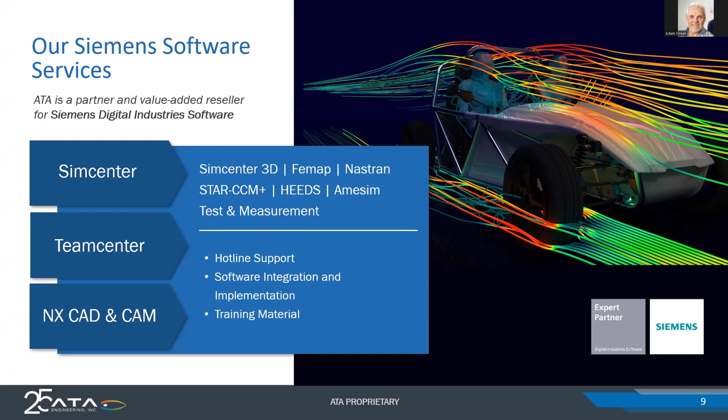So let's talk a little about our subject today. We're looking at STAR-CCM+ 2506, the new version. And Chris is going to talk about these new features, but really from a list of about 130, he's picked out the ones that we find of great interest to us, and he's going to talk about those in more detail. I won't read them out because you can read them too.

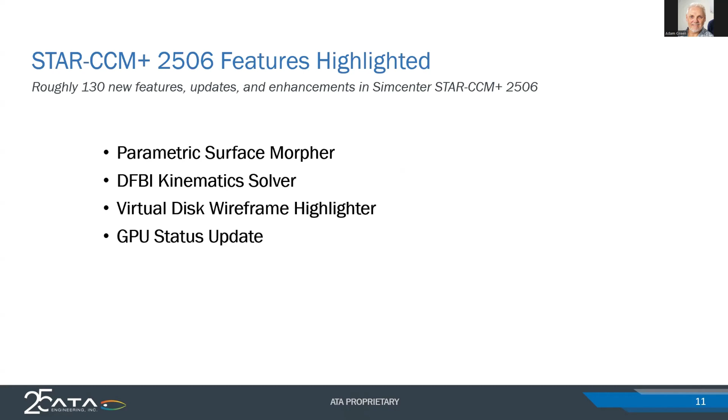But one of the things that is not on the list that Chris is going to do that is very exciting, another one of those 130 features there, is a new technology called ray tracing. STAR-CCM+ obviously deals with CAD data, deals with computer models of really almost anything, and often the results from a viewing point of view sometimes look as if they are CAD data.

They look as if they're a little sterile compared to Hollywood kind of thing. So ray tracing is not new, but it's new in STAR, and it lets you really deliver photorealistic images of CAD models and CFD results.

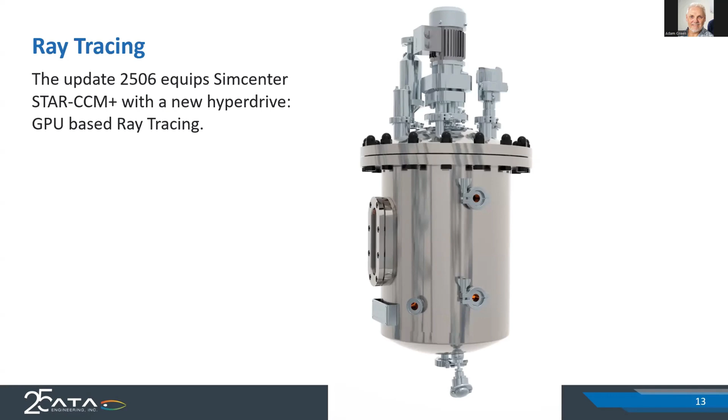So if you look at something like this tank, that shows up made of stainless steel. If you're looking at that as a CAD file, you might not see that. So this is actually a STAR model, fully ray traced, and looking very realistic. And with screenplay within STAR, you can also apply the ray tracing and the geometry selection to really create very photorealistic videos and still frames.

And so this is a little different to GPUs, which is something Chris is going to talk about in his presentation, where GPUs are used to accelerate the mathematics of solving. But in this case, this uses a specific part of the GPU, mostly desktop GPUs, for ray tracing with RT cores from NVIDIA, really developed for the gaming industry, but with a specific hardware algorithm on a chip to let you do ray tracing very quickly and at very low cost.

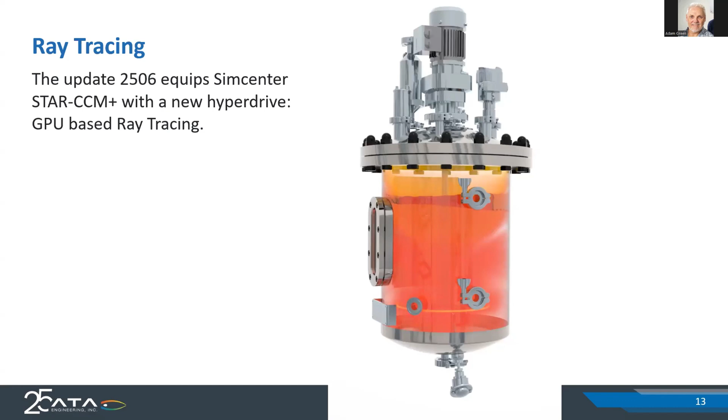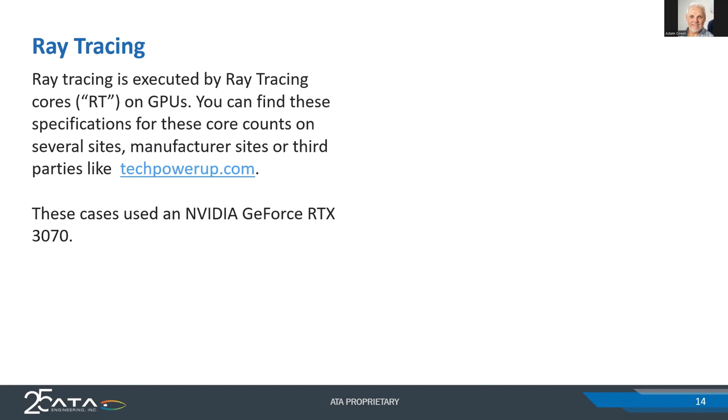If we look at some of these examples, basically it runs on the GPUs, but that last example was run on an NVIDIA GeForce RTX 3070, which is about a $200 desktop graphics card. They have ray tracing cores on board to be able to do this. So this could be done by everybody in our audience, and everybody who is using STAR could certainly add a decent graphics card and be able to do ray tracing on all of their models to add a level of photorealism.

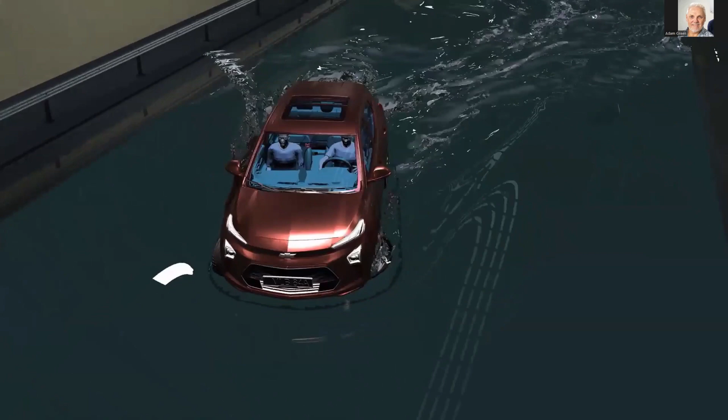And so when we look at this next video, I hope this gives everybody a feel for what can be done. Now, remember, this is a STAR model and the results from a STAR simulation. So it's a CFD model, but really every part of it looks very photorealistic. Now we can tell it's still a computer model. It's not that realistic, but it's still a lot better than we've seen previously.

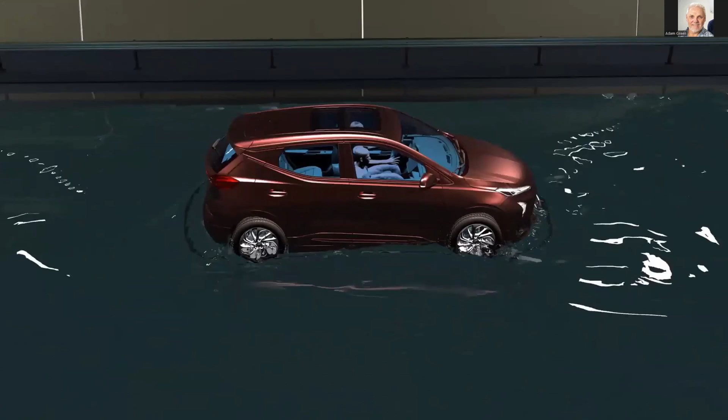Let me actually play that once more because I think it's interesting. Obviously the car's ray traced, but also the water that the car is passing through has reflections as well, and all of the pieces of the visuals are applied. So I think it's very exciting, and I hope that the members who are listening and people who are watching the recording of this will try that out.

So without further ado, over to you, Chris. Thanks a lot, Adam. Can you see my screen? Yes. Great. All right. Thank you so much.

Yeah, so as Adam mentioned, a lot of new features were introduced in STAR-CCM+ 2506, roughly 130 if I counted correctly. I don't have time to go through all of those, but I picked out 4 that I thought were worth mentioning. They may not be the 4 most impactful features to you, but I thought that they're interesting, worth pointing out, and in the case of the DFBI Kinematics Solver, kind of a fun example of what you can do.

So I'll start with the Parametric Surface Morpher, which I'll go into more detail about later, but it allows an analyst to parametrize geometry for which no CAD exists and the analyst only has access to a tessellated surface mesh. So this kind of opens up the pathway to doing design trades or even design space exploration.

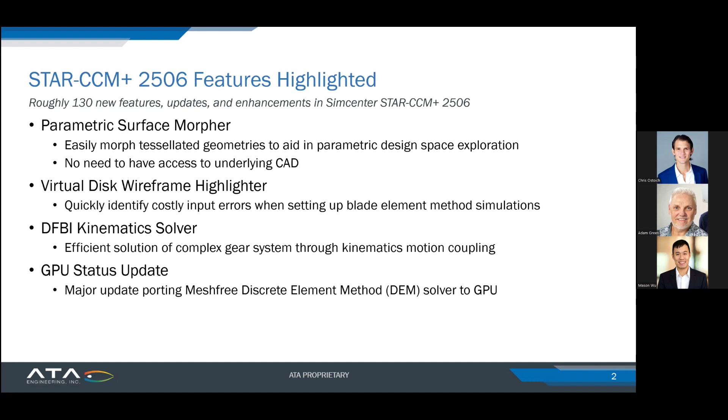Okay, so the Parametric Surface Morpher allows parametrization of tessellated geometry. To arrive at a good design oftentimes requires a back and forth iteration between CAD design and analysis. Ideally, an analyst performing the trade studies might have access to the CAD so that he can make changes to that geometry. Unfortunately, sometimes only tessellated geometries are available to analyze, and this can make design iteration on the geometry very difficult or even impossible.

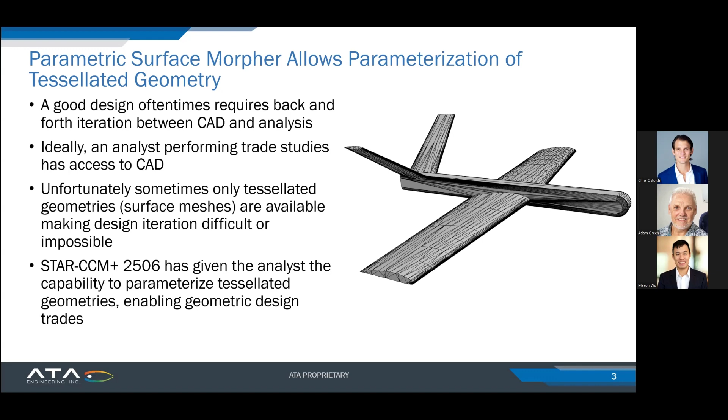Luckily, in STAR-CCM+ 2506, the analyst is given the capability to parametrize tessellated geometries, enabling them to make geometric design trades. So the example that I'm going to use here is this drone that I pulled off GrabCAD. And I'm going to use this parametric surface morpher to change the length of the wing of this tessellated drone geometry. So this is very easy to do.

I first just needed to identify the displaced part. So in this case, it's just the tip of the wing, and I'm gonna say this is the part or the surface that I'm going to displace. And then I identify the floating surfaces. Those are the surfaces that are attached to the displaced surface. So as I move that wingtip out, of course, the wing surfaces need to float along with that motion.

And then there are also the fixed surfaces. So you can specify these, but by default, STAR will just assume that anything that is not in the set of displaced surfaces or floating surfaces is a fixed surface. Then specify the translation vector and the coordinate system along which that translation occurs.

So the example that I'm using here again is this wing of this drone. And shown on the lower right, I've got my parameter, morph length, is what I call it. So at 0, we've got the wing with the original length, and then if I put it at 0.5 meters, then it extends the wing. And this drone has a wingspan of approximately 2 meters.

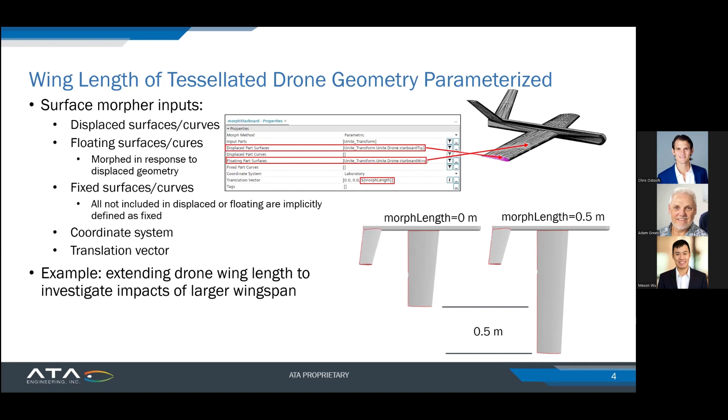So this enables me to make design trades, or I can plug it into STAR's design manager and do a full-on optimization. So in this case, I'm doing a multi-objective optimization. The results here are kind of trivial because I'm only varying this one parameter, but with this parametric surface morpher, I was able to take this tessellated geometry and really understand this design space and understand the trade-off of lift over drag versus wing moment.

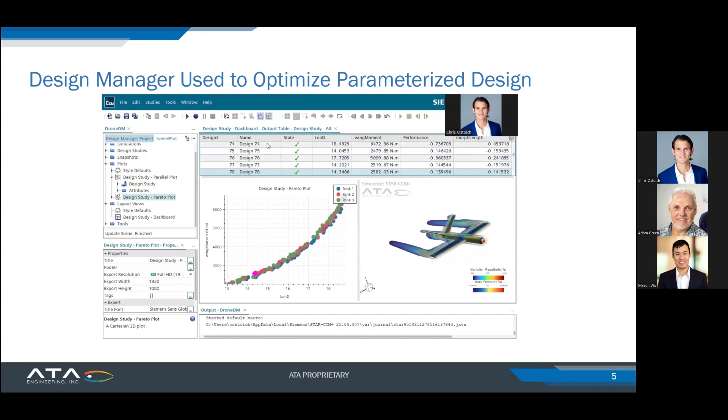So anyway, I think this is a powerful capability, allowing an analyst to do something that they could not previously do with only a tessellated geometry. Okay, so I'm going to move on to the virtual disk wireframe highlighter, which really, I think, increases the usefulness of the blade element method.

So I think we can all say that helicopters, rotomachinery, are complicated machines, and performing a simulation in which you have to build a mesh that is resolved down to the helicopter blade, and capturing the flow physics there can be expensive. The blade element method is a powerful tool that allows you to skip modeling the blades explicitly, and allows you to accurately analyze the complex flow field associated with helicopter rotors.

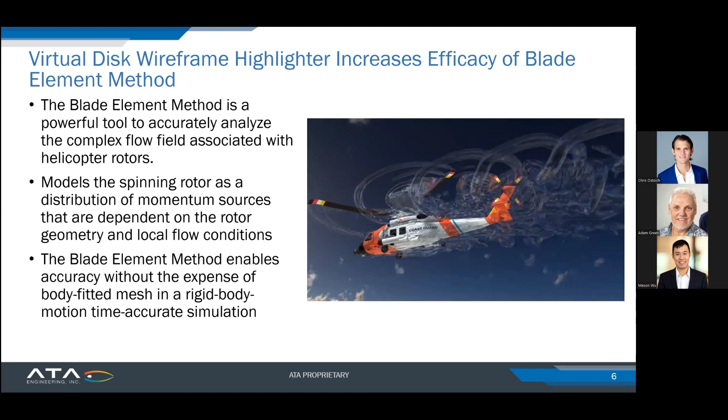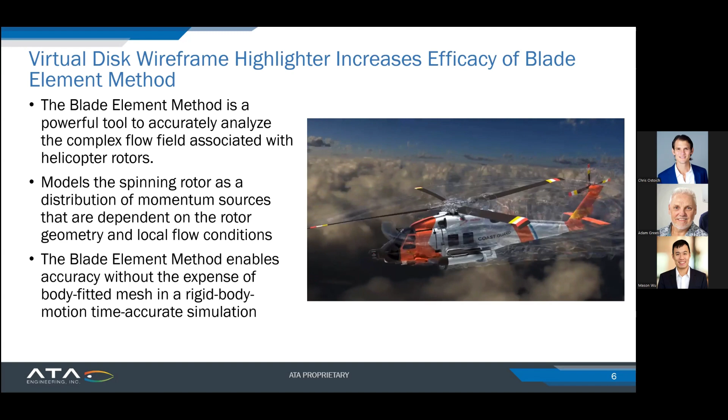It models the spinning rotor as a distribution of momentum sources that are dependent on the rotor geometry and local flow conditions. So this allows you to achieve the accuracy of capturing the flow physics around a helicopter rotor without the expense of a body fitted mesh in a rigid body motion time accurate simulation. So blade element method provides efficient and accurate predictions.

Shown on the right is a steady state simulation that I did using blade element method of this helicopter here. But to achieve that accuracy, there are many inputs required to use the blade element method. So what that means to me a lot of times is there's a lot of opportunities for me to make a dumb user input error.

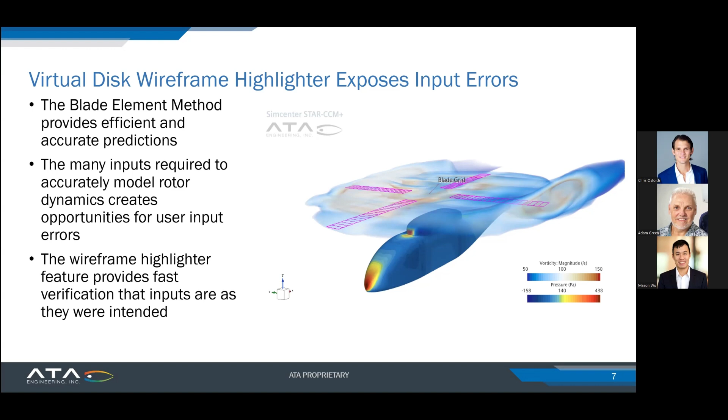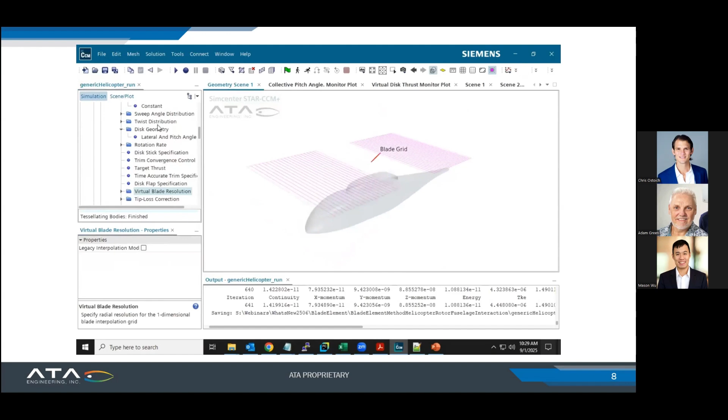They're crashing into the fuselage. There's only two of them. They're way too big. What do we need to change to fix it? So one of the things was change the pitch angle. Now that looks correct, but these blades are still way too fat. There's only two of them. What else needs to be changed?

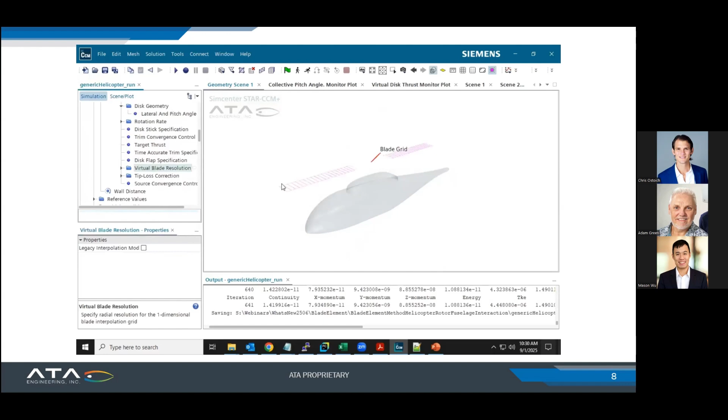So I go up to chord distribution. I find that I specified that they're 0.6 meters instead of 0.06. So I change that. I go back, check the highlighter. Okay, these look like helicopter blades. Now I just need to change them because I wanted 4 of them.

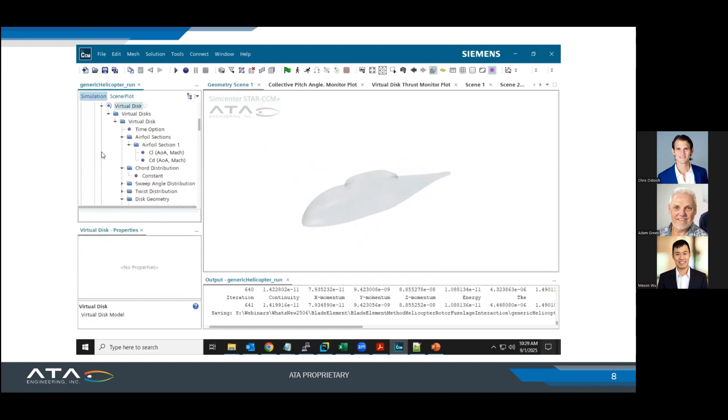And so through all that, I was able to quickly verify that my helicopter blades weren't accurately described by my inputs. I need to make some changes before running a simulation, being confused by the results and wasting time.

All right, so next I'm going to talk about the kinematics solver in the DFBI solver. The DFBI solver, or dynamic fluid body interaction model in STAR, allows you to simulate the motion of rigid and flexible bodies, and the resulting interactions between those bodies and fields around them.

Yeah, the DFBI allows you to model interactions between 6-DOF bodies and any continuum, be that a flow through traditional CFD, or smoothed particle hydrodynamics, electromagnetic field, a solid stress field, or DEM particles. As part of the DFBI solver, STAR gives you couplings which enable predictions of complex interactions between either multiple bodies or the bodies and continuums.

An example is shown on the right, where we've got these two boats moored to this dock, and the couplings are the ropes you see between them. So you can see the complex interaction between the large boat and the dock, and then the small boat and the large boat as those couplings are being pulled, and yeah.

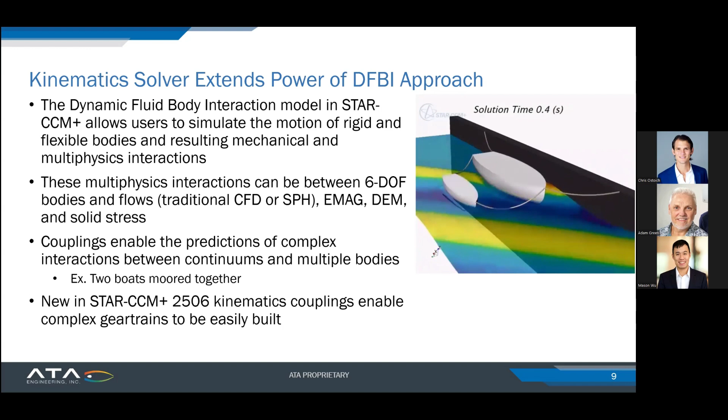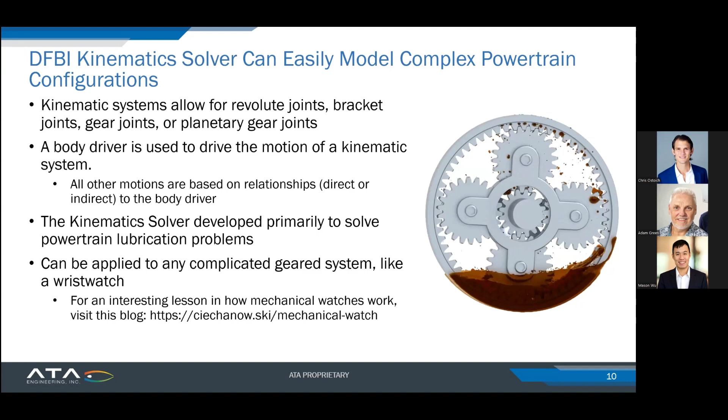So this solver was developed primarily to solve powertrain lubrication problems, but can be applied to any complicated geared system like a wristwatch. So as I was thinking about a demonstration case to show here, I thought it might be fun to try and build a stopwatch or something. And just as an aside, I found this blog on the lower portion of the screen there, that if you're interested in how watches work, the author does a very good job explaining it with an interactive blog, and I had a lot of fun learning about that.